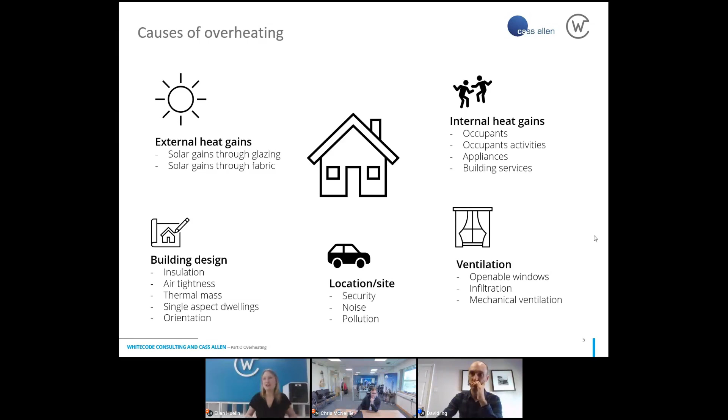In terms of policy and regulation before we talk about Part O, those of you who do developments in London will be familiar with the London Plan. It was released in March 2021, and within that is policy SI4, which is to do with managing heat risk, specifically overheating. We've been working with the draft London Plan since 2018, related to decarbonisation of the grid and the lower carbon factors we've been using.

So many of you, if you've got large developments in London, will be used to completing TM59 overheating reports for London Plan compliance. This was all great - we would do a sample of the dwellings and submit it at planning stage. However, there's not really been any regulation on this. No one's actually checking - has this been done? Have you put your blinds in like you said you were? So it was obviously a good start, but there was no regulation covering this.

So the first thing you should be doing is looking at the fabric of your building - the amount of windows you have, how your building is orientated, how much shading you have, everything to do with the design. This is key in terms of overheating - it shouldn't be thought about later on once you've already designed and got it through planning. It should be one of the first thoughts, if you're an architect starting to draw up designs with your client. Overheating needs to be at the forefront of your mind, because you can make a massive difference in reducing the risk of overheating with good thought on orientation, shading and things like that. So that's the first thing you look at.

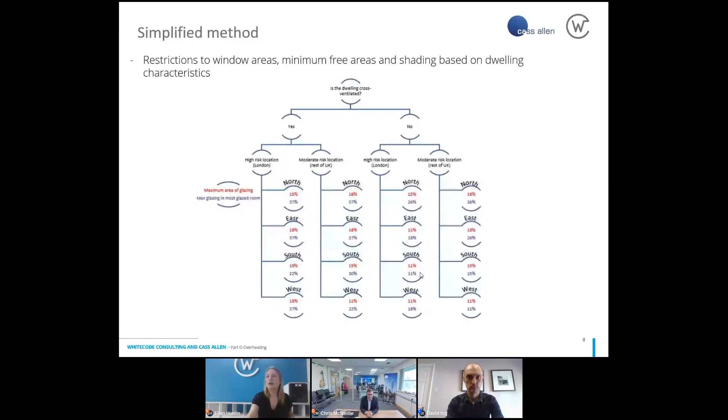I would imagine that most apartments we look at probably are not going to comply with this, and I'll show you some case study examples in a minute. Furthermore, on the simplified method, not only is it restricting the size of windows you're allowed, but also how much of that is allowed to be openable.

As I said earlier, there's lots of numbers on these slides and it's a lot to process, but hopefully you realise that complying with the simplified method is not simple and it's very restrictive. So you're probably going to have to go down the second route.

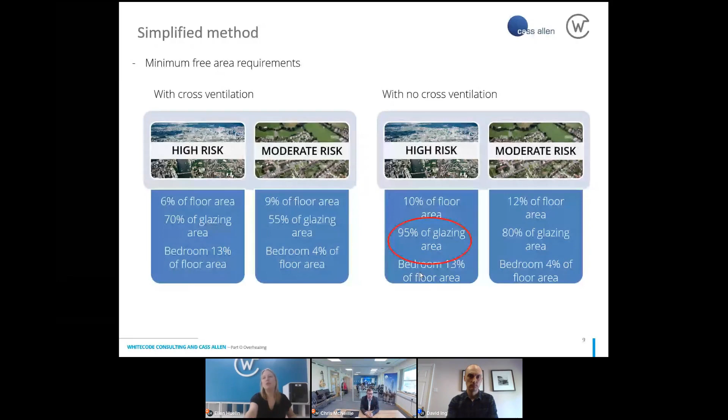The other restrictions in terms of simplified method are on the type of window. There's three things: you have to limit the area of your windows, maximize the openable parts, and if you're on what's called a high risk orientation - essentially anywhere from west all the way around to east, so west, southwest, south, to east - if you've got windows with those orientations, they also need one of these other things.

This is also related a little to our energy calculations, because weirdly, in Part L and SAP calculations, we want a higher G value because we want more solar gains to come in, as that reduces the heating load. But for overheating, we want a lower G value. A G value of 0.4 is quite low, but you can go lower, and that's probably quite a good balance between doing the energy calculations and the overheating.

So when you're looking at this overheating, don't just look at it on its own - excuse me, something in my throat - don't just look at it on its own. You've got Part L as well to look at, which is to do with the energy.

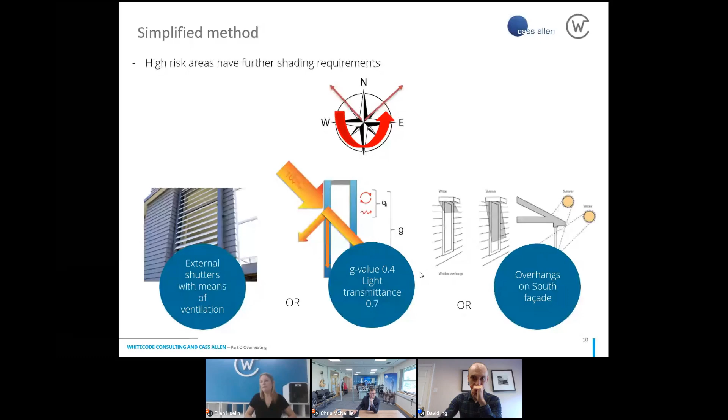This apartment had its largest glazed facade to the east. The apartment itself is 70 metres squared, quite standard. The total area of glazing for the whole apartment is nearly 20 metres squared, 18.9 metres squared, which as a percentage of the total area came to 26.9%.

If you can remember that flow chart, you won't remember all of it, but on there I showed that the maximum allowed glazing for the whole flat is actually 11% for this situation. So it's way exceeding the maximum allowed, and it does not pass the simplified method.

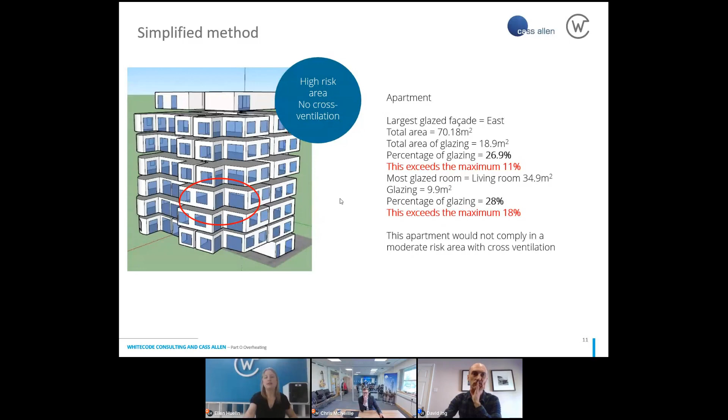So yeah, this was quite surprising to me, and I was thinking, oh my goodness, is anything going to pass? The most glazed room passes, but interestingly, if you move this house around on the site, if this was a house type that was being orientated differently, the house would comply if the rear was orientated either north or east, but not west.

Because obviously if it's orientated with a north-facing garden, the allowable percentage of glazing goes up, so that's another thing to think about. If you're building houses like this and you've got things that are moving around the site, if you find that one complies in one orientation, it may not comply in the other orientation.

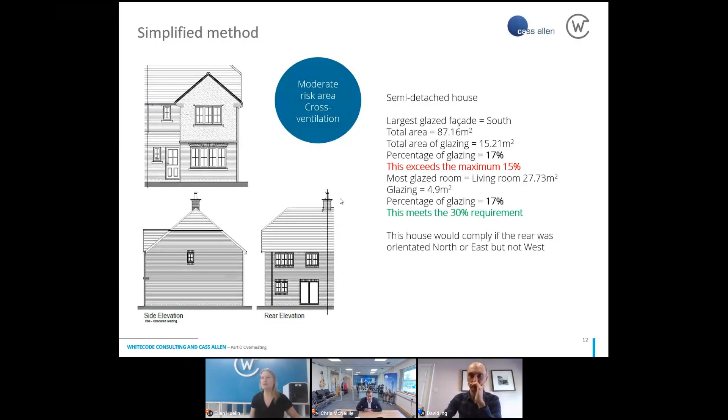So what we're going to do, if we find out that nothing complies with the simplified method, is go to option 2, which is dynamic thermal modelling. This is what I was talking about earlier, that we have been using for London plan compliance since 2018, and this is called CIBSE TM59.

You'll see here, this is the CIBSE TM59 guide. This always makes me laugh because on the front of the TM59 guide, which is written for the UK, is a lovely villa or something in Provence or somewhere lovely and hot. They've got these shutters that cover the windows, like we've seen when we go on holiday. Now, this is not representative of anything I've seen built really in the UK, maybe a farmhouse, but nothing new build, nothing that the developers I work with are doing. So I find this quite ironic that they've put this picture on the front of the TM59 guidance, because it's really not representative—and they've got some lovely shading as well there from some vegetation.

But anyway, this is the guidance, and it's a standardised approach to predicting overheating. So this is specifically for residential buildings.

It's called CIBSE TM59 because that's just the technical note it's named under, and it's a risk assessment. It offers a lot of greater design flexibility. Where we were looking at the simplified method, we saw that there were lots of restrictions on your window openings and window sizes. But if you do a dynamic thermal model, you get a lot more design flexibility in terms of your window sizes.

There's actually a rule within Part O that you cannot use the simplified method for apartment blocks with a communal heating system. So actually the simplified method, although I've spent quite a long time talking about it, is probably out the window for a lot of London developers who need to comply with the London Plan, because they would require communal heating systems to be compliant for district heat network connections. So if you're designing an apartment block in London with a communal heating system, don't even bother looking at the simplified method because you must use dynamic thermal modelling.

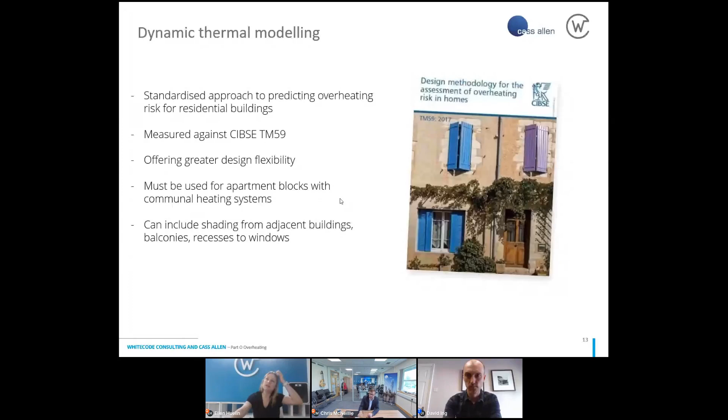That's because if you have heating pipe work down the corridors, that also causes an overheating issue, which needs to be included within the TM59 assessment. The other good thing about TM59 is that we can include lots of other things like adjacent buildings for shading, balconies, and recesses to windows. There's a lot of detail we can put into the TM59 assessment, which makes it a very powerful tool. A bit of a pain to work with sometimes, but it can really help you look at different ways to deal with overheating in terms of window design.

So this is the TM59 requirements, taken from the TM59 booklet I just showed you. There's a lot of words here. You don't necessarily need to understand all of this, but essentially, for naturally ventilated situations, which is my ideal case where we're allowed to open the windows, that's great. You can see that window open there, looking out, lovely. Probably wouldn't be allowed to open that window, probably a bit too noisy, but that's what Chris is going to deal with in a minute.

So we've got two criteria that we need to meet for TM59. The first is to do with the maximum adaptive temperature. A lot of people ask me what's the maximum temperature we can get to before it's deemed to be overheating. It's very much adaptive, based on the climate and local weather conditions. If it was a very hot day, people are more likely to be happier being slightly warmer in their dwellings than if it wasn't a hot day. So it's adaptive to the external temperature.

The temperature difference cannot be greater than or equal to more than 1 Kelvin over the adaptive temperature for 3% of the occupied hours of summer. A bit of a mouthful, but basically our target is 3%. If we go over 3%, it means you've failed TM59. This 3% basically says there will be some hot days in summer, and for 3% of that time, that's okay—people can live with that and they're not going to be too hot. But if it goes over 3%, people are going to start getting annoyed, feeling too hot, not being able to sleep, and things like that. So that's one of the key things we need to think about—meeting that 3%.

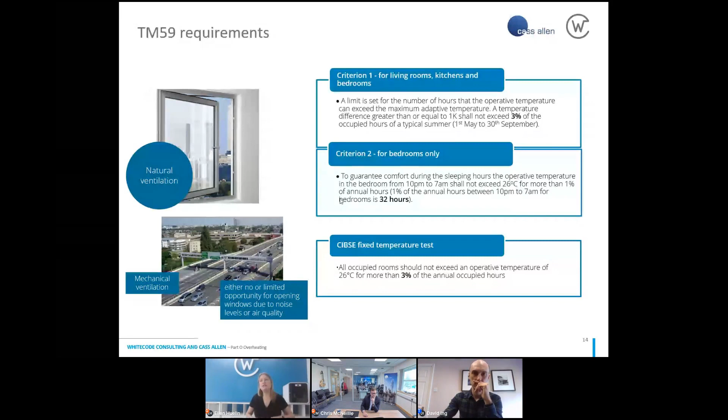The other criterion relates to bedrooms only, and this is really looking at nighttime comfort and how people are going to be sleeping—guaranteeing comfort during sleeping hours. That looks at between 10 p.m. and 7 a.m., for bedrooms only, that it can't go over 26 degrees for more than 1% of annual hours. So for the whole year, it's allowed to go over 26 degrees for 32 hours, which is maybe a few nights' sleep in the middle of summer. But if it goes over that, it's deemed not compliant.

So criterion 1 and criterion 2 are specifically for natural ventilation. Where we have either no or limited opportunity for opening windows due to noise levels or air quality, we then look at the CIBSE fixed temperature test, which is a bit more straightforward. All occupied rooms should not exceed the operative temperature of 26 degrees for more than 3% of the annual occupied hours.

So that is where we basically can't open the windows for particular reasons, acoustically maybe, which Chris is going to talk about. So yeah, these are two TM59 requirements.

This might be useful if you end up getting a dynamic simulation model completed. Maybe we do one for you, and you get your results and think, what means pass, what means fail? These are the key numbers: 3%, 32 hours. If you don't have openable windows, then it's just the 3%. So this is what we're looking for in terms of compliance.

We obviously haven't got to the point where Part O is coming into force yet, but I assume the building control officer is going to be asking for a schedule of results for all your units showing this compliance. So this is useful to know so that you can start to really think about what's passing, what's failing.

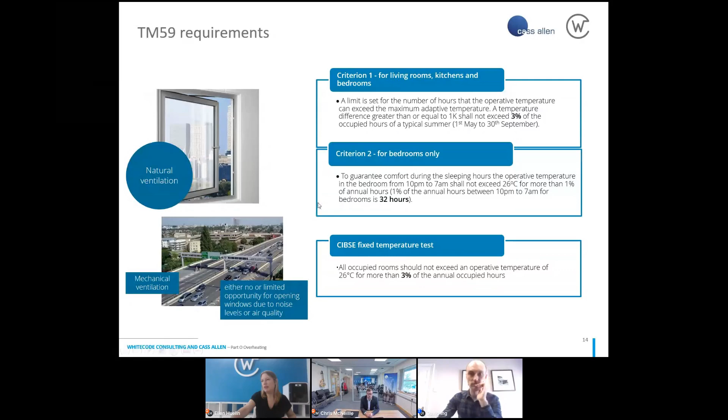What we do for TM59 is a full dynamic simulation for a full year. We get the weather file—we've got weather files available for that particular area covering all the weather for that year, an incredible amount of data. We create the 3D model in line with the guidance, and when we run the simulation, it analyses the building every 10 minutes for dynamic changes in temperature.

It takes into account so many things: the weather, the equipment, the occupancy, how the windows are operated. Every single window in that model, we've assigned whether it's fixed, side hung, or top hung, what degree it can open to—45 degrees, 90 degrees—when it can open, can it open in the day, can it open at night. There's so much information we can put into this, and it gives us a lot more design flexibility than, say, the simplified method, which just limits your window areas.

So this is something we can really help you with. When we start building these models and getting results out, that's when we can really manipulate the data and work out what the best options are for you.

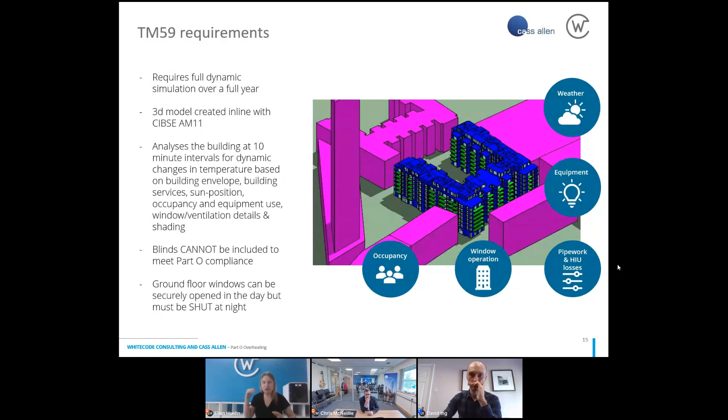The other thing Part O says is that ground floor windows can be securely opened in the day, but must be shut at night. What I'll tell you is that when we do a TM59 assessment, if we shut the windows at night, it automatically fails through the passive ventilation. So that's when we need to start looking at mechanical options. That's how we do it—those are the options, what we do—and then what can we do to actually mitigate this risk of overheating. These are the few options we can look at.

I'm going to look at each one of these in terms of window design. We talked earlier about the low G value, so we'd want a low G value to reduce solar gain. This is quite a highly glazed option here. Large fixed panes should be avoided. What we really want is to maximise the openable area and angle of opening to allow that heat to get out, so when you're opening the windows it lets the heat out and reduces the risk of overheating.

We need to allow nighttime cooling if we can in bedrooms, so windows should be allowed to open overnight. If there's a security issue, that needs to be taken into account. Generally speaking, if you have 100mm restrictors on the windows, it's not really sufficient to comply - it doesn't give you enough air changes to cool off the room.

Large balcony doors or sliding doors in living rooms should also be accompanied by openable windows, because generally speaking occupants wouldn't like to leave their sliding door open onto their balcony overnight for nighttime cooling. So although nighttime cooling is important in bedrooms, it's also important in living rooms to get that heat out, especially if those living rooms have a lot of glazing. It's really a good idea to have some open windows alongside your balcony doors in living rooms.

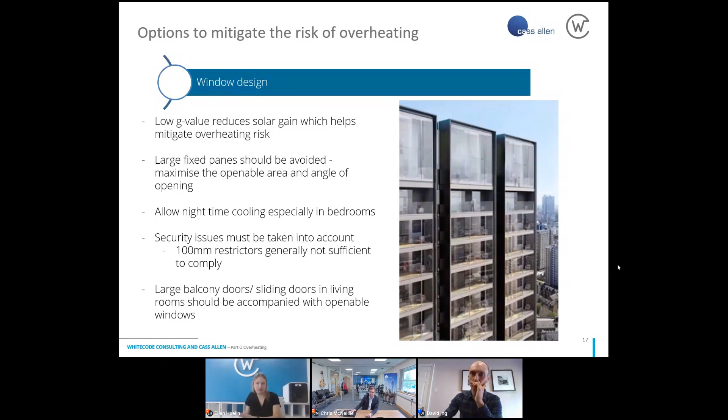We can look at fixed shading. This is good because it really controls the solar gains. It can be included in architectural design, but this must be included at an early stage, pre-planning, and needs to form part of the overall design. It does obviously affect daylight and sunlight, and the occupant can't control it - it's fixed, there and that's it. It may also impact window cleaning.

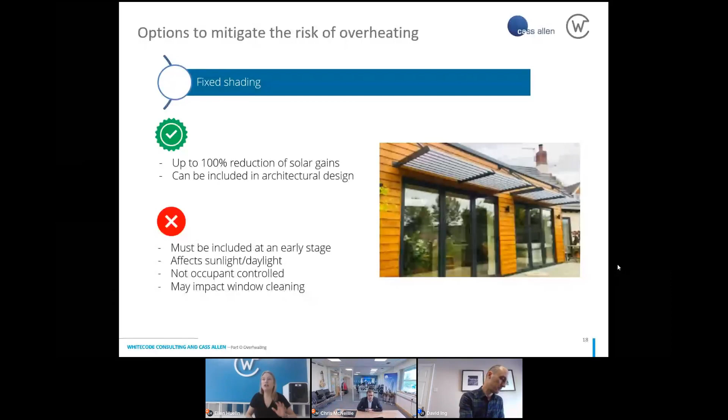In terms of Part O, they are looking for more of this sort of shading to be used, because they're not interested in having internal blinds anymore. So fixed shading perhaps on the outside, or some external shading which is actually movable - these are quite clever, and very much intrinsic to the design of the building.

These are slidable solar shading, so you could probably have it slid over your bedroom in the day and your living room at night, or something like that. It can be moved for daylighting as well, and it can allow ventilation through the louvers. It can also help with winter heat retention. These can be really useful for shading, and we obviously would then not require internal blinds.

However, they are quite expensive, and there's a lot of maintenance involved - think about all that sliding mechanism getting stuck. You need to have openable windows, but the windows need to probably go inwards, because you don't want to open your window out and smash into your external shading. That would not be ideal.

So it needs to be integrated architecturally. I think these are a great idea, but this is going to be for specific sites only, and maybe not appropriate for everything.

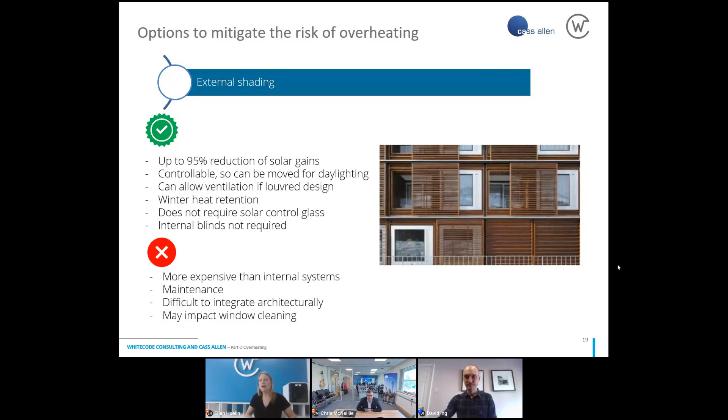We've talked a bit before about internal shading. As I put there against that big red cross, currently Part O does not allow the use of blinds to mitigate overheating - we cannot use internal blinds anymore to mitigate. I said earlier I'm going to look at whether they'll allow interstitial blinds, which you can see here, because blinds are actually really useful. This isn't to say people won't put blinds in and use them to mitigate the risk of overheating, but they cannot be used within our calculations, which is a little bit disappointing because they do work quite well.

However, we do get quite a lot of non-compliance in terms of blind installation, because to be compliant with TM59, the blinds need to be installed at base build.

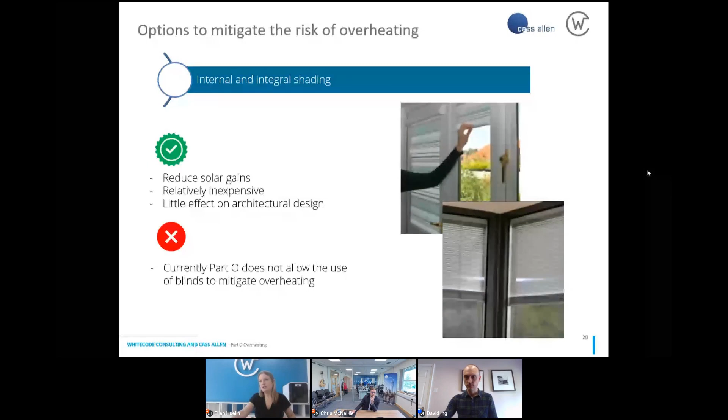There are obviously other factors that affect Part O, and as I said earlier, all the parts of the building regulations interlink with each other. Chris is going to talk in a minute about acoustics and their effect, but there's also things about security and protection from falling. All these things are really important to ensure we reduce the risk of overheating, but we're not obviously coming up against other parts of the building regulations that may be affected.

So we've talked about shading. How do we shade the building? What are the different options for that? But as I said earlier, that's just one part of the overheating. So that deals with the solar gains.

That'd be great if it complies, and we can then say the windows will open to a certain amount, this much is fixed, this much is openable. It's still not super easy to get compliance, even if the windows are fully openable, depending on the amount of fixed glazing, the orientation, and all those other things I've talked about. It's not easy, and overheating is a challenge on many sites, I'd say.

It starts to become even more of a challenge when we start getting some acoustic issues or security issues. If there's sort of minor acoustic issues, maybe the windows can open at certain times, but not others. So we can have a bit of a hybrid approach where the windows open sometimes. Perhaps we use acoustic louvers to deal with that ventilation, but also help stop that acoustic issue coming in. Because when you're thinking about it, people when they're asleep, it's either going to be noisy or it's going to be hot. Chris is going to go into a bit more detail on that.

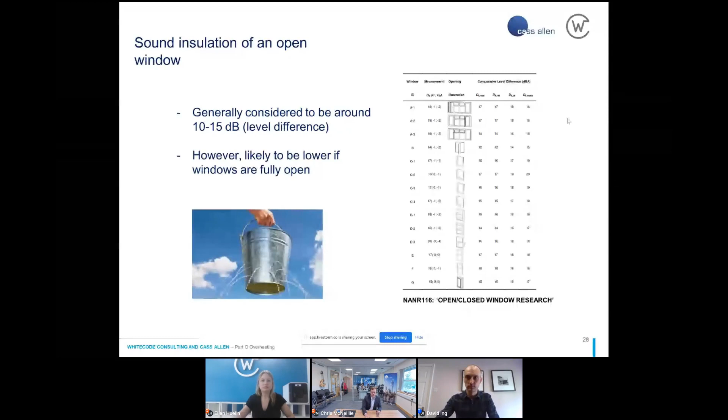That said, this research is all based on windows being very slightly open. If you fully open that window and increase the open area, that reduction could be much less. I think that's something that's going to become critical over the next couple of years as we try to comply with Part O, because often with overheating assessments, as Ellen will tell you, it's not just cracking a window - to comply, it's often opening the window 200 mil or so. So that's something where we need more data and research.

For many years, we've been designing properties in noisy areas, whether greenfield development close to roads or apartment blocks in the middle of London, etc. We have very well established noise criteria for what's good design when you have your windows closed, given in British Standard 8233, which most of us will have seen in planning conditions. We take the external noise level and calculate what the glazing and ventilation needs to achieve with the windows closed to comply with these levels. It's only really in the last probably 10 years that people have been thinking more about the effect of open windows, as overheating has become more of a problem as we build more condensed housing and the other factors that Ellen mentioned that contribute to overheating.

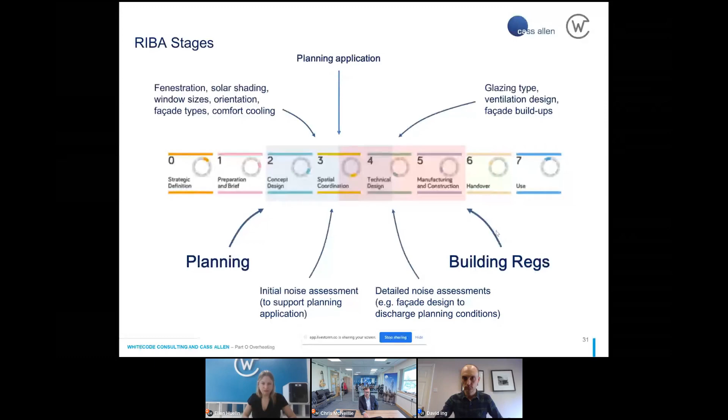Okay, so on to the specifics of Part O and the actual noise requirements. This is it - just three paragraphs, but they're quite powerful in what they require. They set very strict limits for noise levels in bedrooms at night, and it's only bedrooms at night - there's no noise limits for living rooms or any rooms during the day. The idea behind this is that people can have good quality sleep and aren't disturbed at night, or put in the situation where they have to choose between high noise levels and thermal comfort.

The thing about these limits is they're very low. We said before that the typical outside-to-inside noise reduction of an open window is about 13 dB. So you can take these internal limits and consider that if we're going to use an open window to control overheating - which, as Ellen pointed out, is your first port of call in any energy assessment, and what you're ideally hoping to achieve - it's very difficult to achieve thermal comfort without an open window.

It equates to 53 dB LAeq externally, or 68 dB LA max. The LAeq is the average noise level over the night, and the LA max is the noise level during individual events, so that might be trains going past or cars driving past. And they're quite low noise levels.

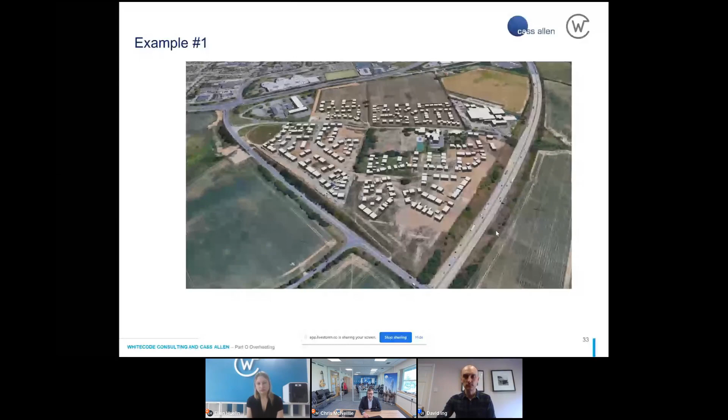But obviously the next thing you've got to think about is which of those facades are most likely to overheat, and that would be the south facing ones. So you could say very quickly in this case which facades you're going to have to worry about most, and that's where at a very early design stage we can look at it and say that's where you want to be thinking about solar shading or other measures to avoid issues at the regulation stage.

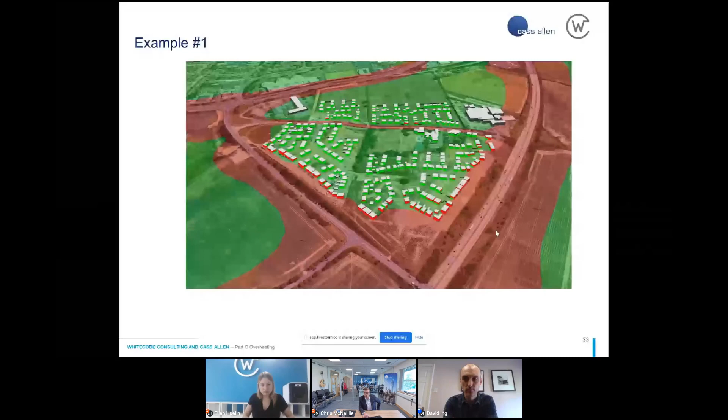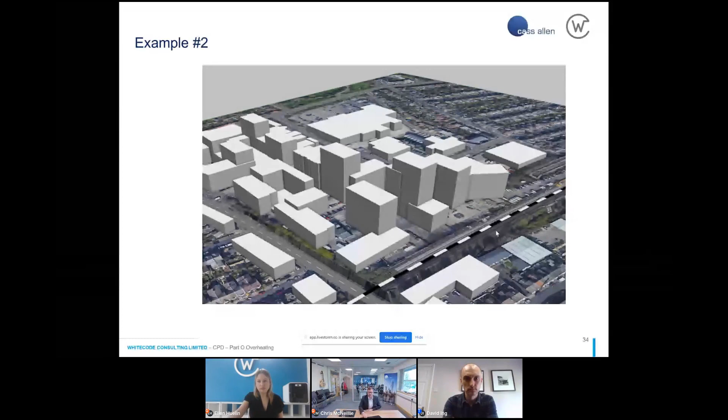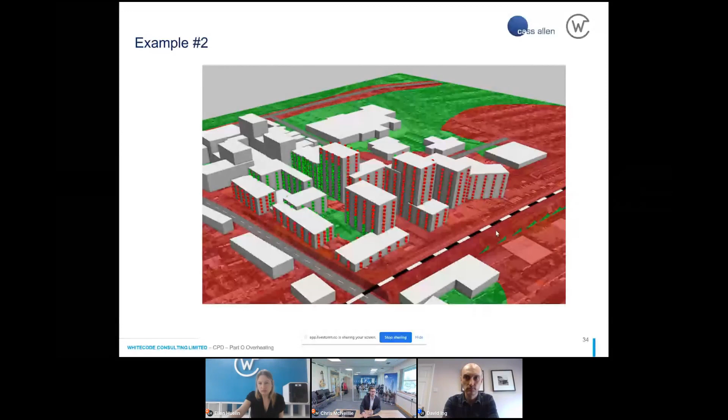So that covers the acoustics, which is a fairly small part of the Part O requirement, but a very important one. And these conclusions are kind of shared conclusions, from both the overheating and noise side. Part O must be complied with, and there will be issues if we don't think about it early in the design. We saw that with Part E, which relates to sound insulation - it came in back in 2003, and it took a while for developers to catch up with it, causing lots of problems. So the purpose of this presentation is hopefully we can all avoid these problems by thinking about it early, because they're always painful.

The acoustic requirements and the blinds, as mentioned, are going to exacerbate the overheating problems we already come across in developments in London. And this regulation now applies throughout the whole of England. So if you're a developer that isn't involved in much work in London, this is going to be very new to you.

Full TM59 assessments will be more common, and building control officers are going to be asking for Part O reports, so we'll be putting plenty of those together. One thing as well is Part O compliance doesn't necessarily mean good design - a good example is when talking about the different types of noise we have, you might want to go above and beyond the Part O requirements, for example for bedrooms if you have a particularly annoying type of noise on the site. That's similar to Part E, which has minimum standards for sound insulation between dwellings, but often we'll be advising developers to do better than that, to provide better quality accommodation. That's fairly standard now.